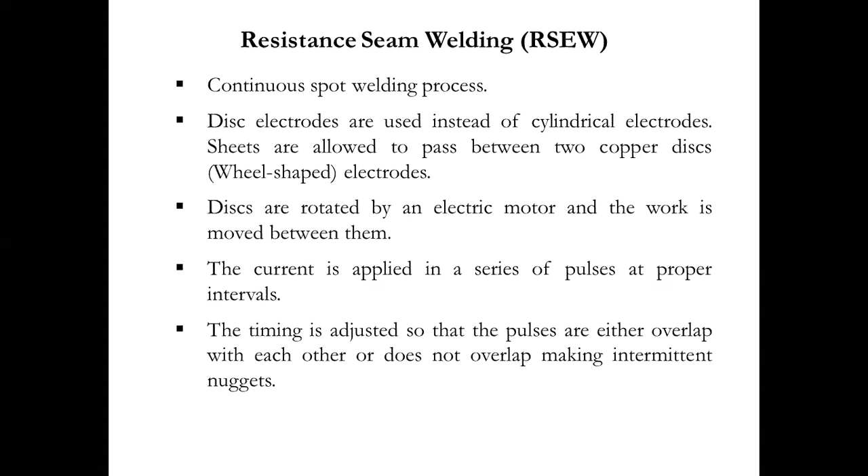The time taken for seam welding is very less compared to spot welding. In spot welding, you have to first adjust the workpiece and then it should be in contact. All that hold time or squeeze time will be very less in seam welding. So from the time point of view, resistance seam welding will be faster compared to spot welding.

Advantages: leak-proof joints can be done using resistance seam welding, and it is independent with respect to weld time and electrode speed. Both the speed of the wheel and the weld time are independent.

Disadvantages: it can only weld up to 5 mm. Here, the current supply and the pressure applied by the disc will be more in seam welding compared to spot welding. And you will have indentation marks, which are more in resistance seam welding.

Coming to the applications, it can weld MS (mild steel), aluminum, magnesium, and nickel alloys, watertight tanks, the flanges in watertight tanks, and pipes. Fabrication of tanks is done by resistance seam welding.

There is a utensil with me now. I'll show you after this session how the spot welding is done to that utensil. We'll see how it is done by the spot welding technique.

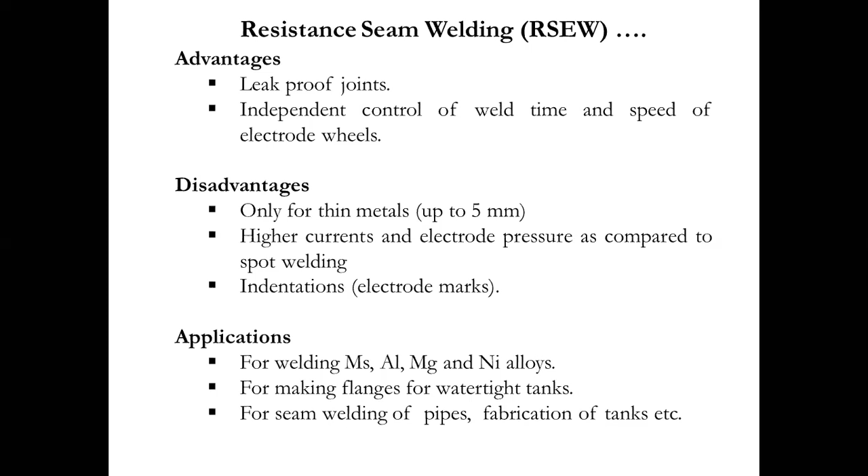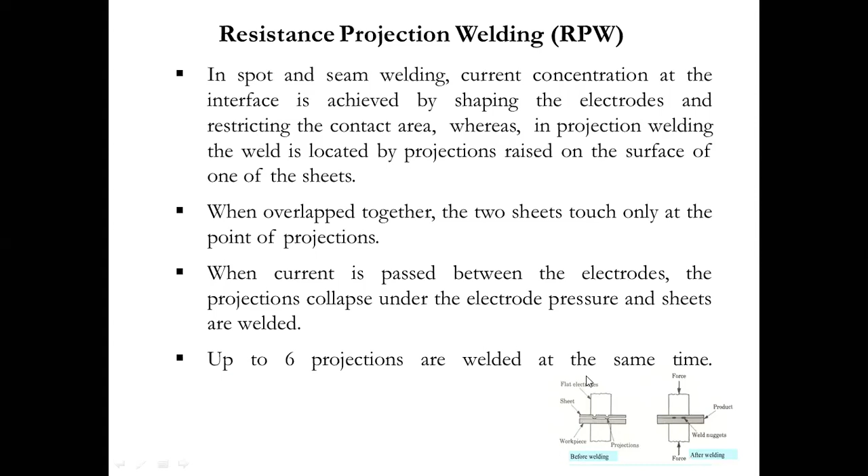These projections are raised onto the surface of the workpiece either by embossing techniques, and these projections are pressed, and you will apply the current and pressure simultaneously. So up to 6 projections you can weld at a time in resistance projection welding, and it is a very quick process when compared to spot and seam welding.

So this is the diagram before welding, and this is the diagram after welding. Please have a look of it.

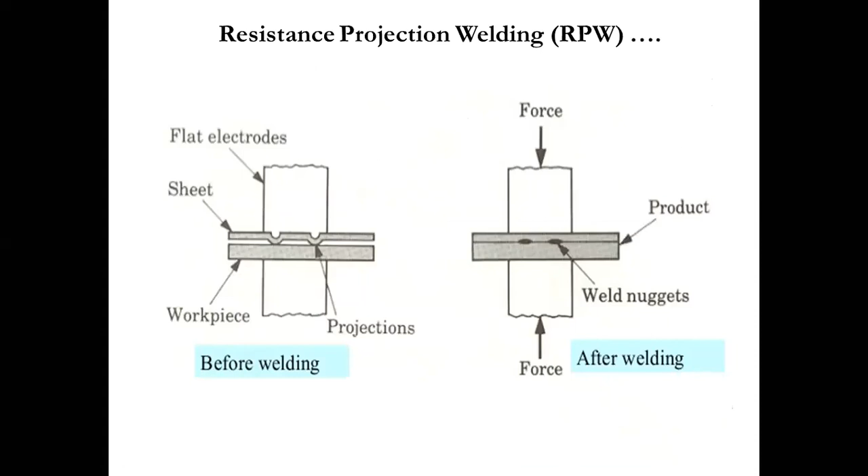Advantages: because of giving the pre-interfaces, or pre-interface is nothing but you are giving the projections beforehand, the life of the electrode will be high when compared to spot and seam welding. And here you will not have an electrode mark.

Whereas when you were doing spot welding, you were getting a mark on the sheet. So that mark is avoided as you are giving a pre-interface, or you can call it a synonym, you are giving a projection. So that's why you are not having any marks created by electrodes.

So less chances of distortion, and it is suitable for thick materials. As you are giving a proper projection beforehand, you will have a proper heat balance. And it is suitable if you want more spots at a time.

Disadvantages: again you have to do the embossing technique, so the cost is more, as it is two processes at a time, embossing and then welding. So prior operation is needed, and it is only suitable for strong materials. Copper and brass are not suitable for projection welding.

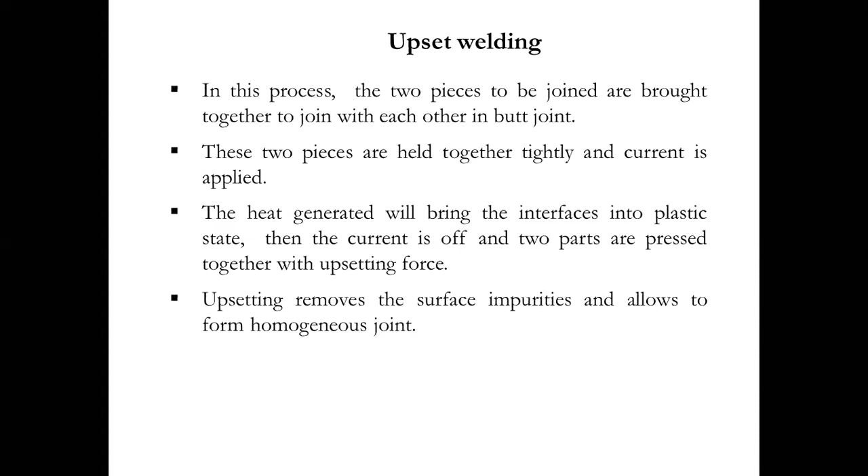Now we'll see, I'll just first compare. I'll show you the diagram now, then I will explain what upset welding is, and then I will compare it with flash welding. Then you will understand it very easily.

When these two workpieces slowly come into contact with each other, you get a collision, or in normal language, when you allow them to touch each other, the material will start transferring. There will be a transferring medium between these two workpieces.

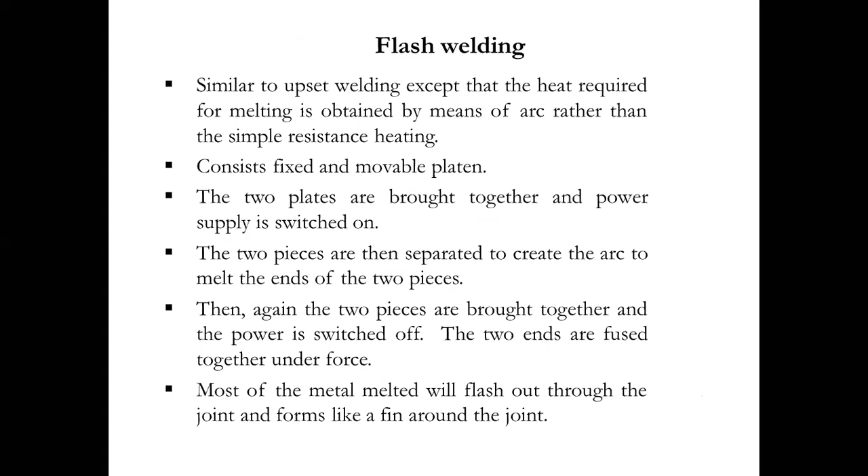Now let's see what is percussion welding. Percussion welding is similar to flash butt welding, and in some cases both machines look the same. The machines look similar, but the clamping systems are different in flash welding and butt welding. But in percussion welding, you will give a DC power supply.

In percussion welding, the same concept applies, you will weld the two edges, but here it is very percussion. The meaning of percussion is rapid - anything which we do rapidly, very instantly, very fast, is called percussion welding.

So in percussion welding, you will have the clamping system, you will have the current supply, but you will have a rectifier - you will have an AC supply and you will have a DC supply. And to that, you will have a capacitor which will smoothen the DC supply.

So when sending power, in percussion welding, first you will send the DC power supply to the workpiece. So you will get a high intensified discharge of electrons. As you are using DC, you will get negatively charged ions onto the workpiece.

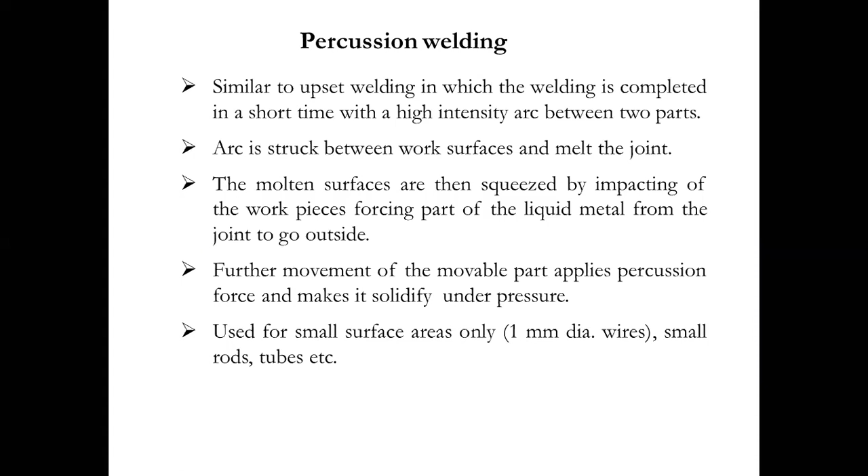So this is meant for joining wires, rods, tubes, etc. This is percussion welding.

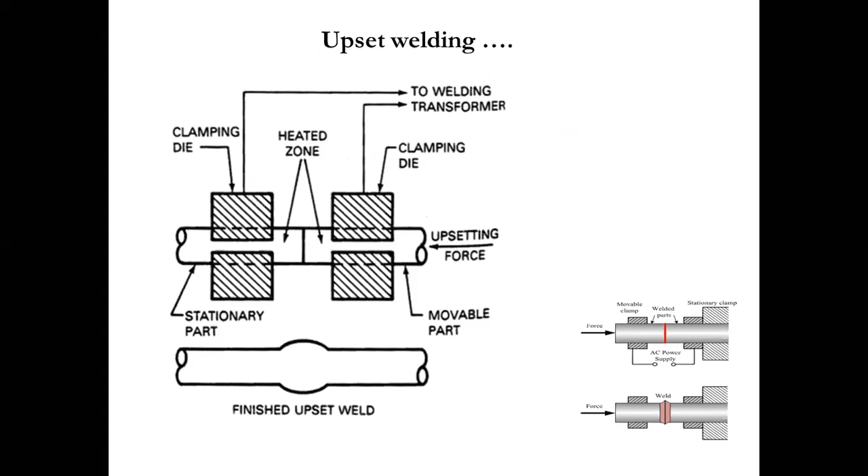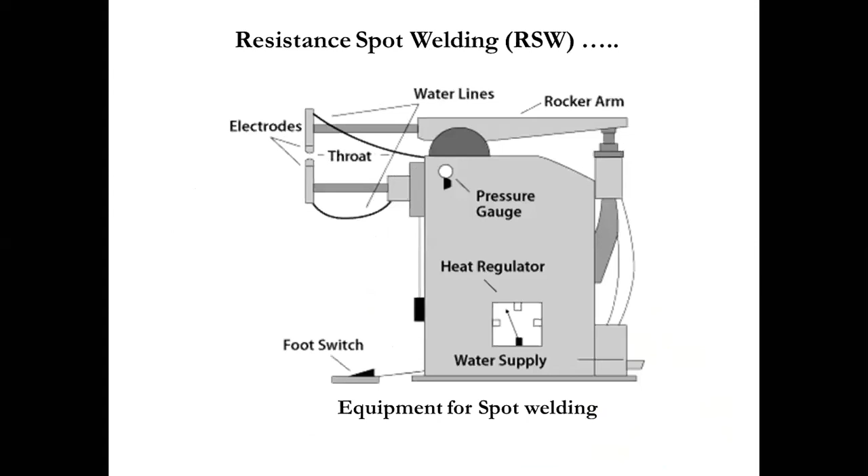So we had seen flash welding, we had seen upset welding or butt welding. Here you can see how the welding is done between the two edges of the rod. I had told you how to remember the difference between butt welding and flash welding. Then we had discussed resistance seam welding, resistance projection welding, and resistance spot welding. All these will come under the resistance welding category.

The first two are for lap joints. Projection welding is used if you have any projection, you can weld it through projection welding. If I want to do edge to edge contact or the butt joint, I'll go for upset or flash welding. If I want rapid, very intensified welding within a second, I'll go for percussion welding where I'll be using a DC power supply. So this comes under resistance welding.

Is it clear? Is it clear?

Ma'am, in percussion welding, the high DC current will be there, ma'am. Yes. So there will be some deposition type on the welding? Yes, you will get material, you will get a deposition.

I said the molten metal, you will get a groove or a step sort of thing. Again, you have to do the finishing method to remove that. Again, you have to do the finishing technique in percussion welding. Whereas in flash and butt welding, you will not get such grooves, just only surface to surface contact will occur.

Got it, yes ma'am. Percussion welding they will do for strong materials, whereas in upset flash welding they will do only for small rods or wires or tubes.

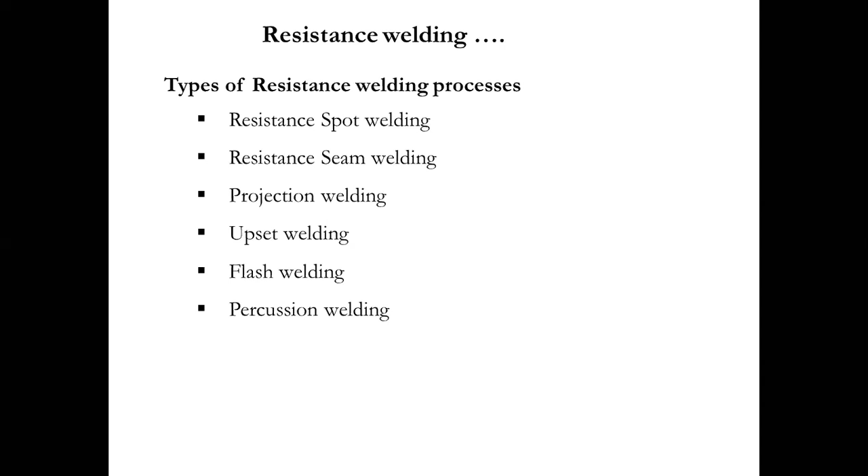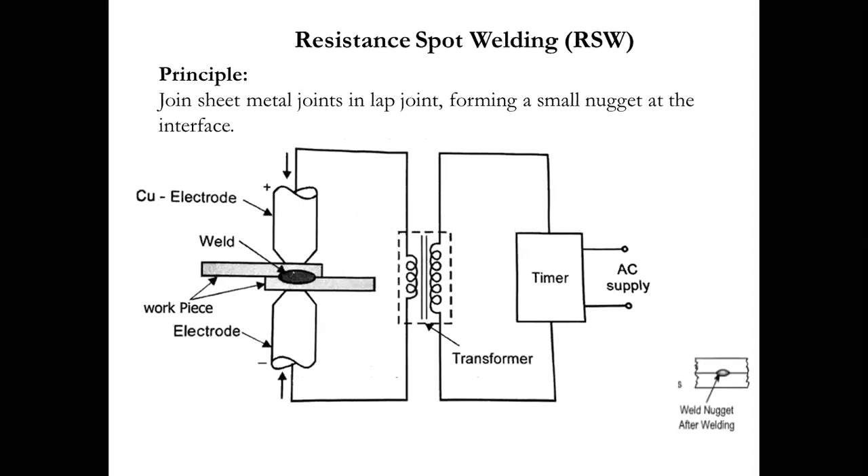There you will have less pressure, whereas here you are supplying heat and pressure also. One thing I forgot to say, in upset welding and flash welding, to make these two rods come in contact with each other, one will be fixed and the other one movable. There are two clampings, one fixed and the other movable.

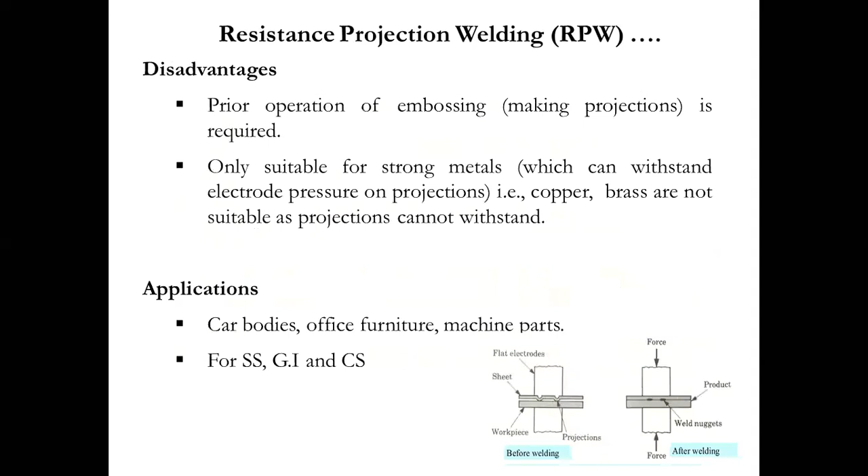Let me show you. Yes, one is stationary and the other one is movable. When you are putting it in contact with this rod surface, you have to apply a certain amount of pressure. So based on the application of pressure also, the flash or whatever the joint is, is dependent on the current and the pressure.

Please do remember, resistance welding is dependent on the amount of current which you send and the amount of pressure which we apply, in order to create the nugget between the two different surfaces.

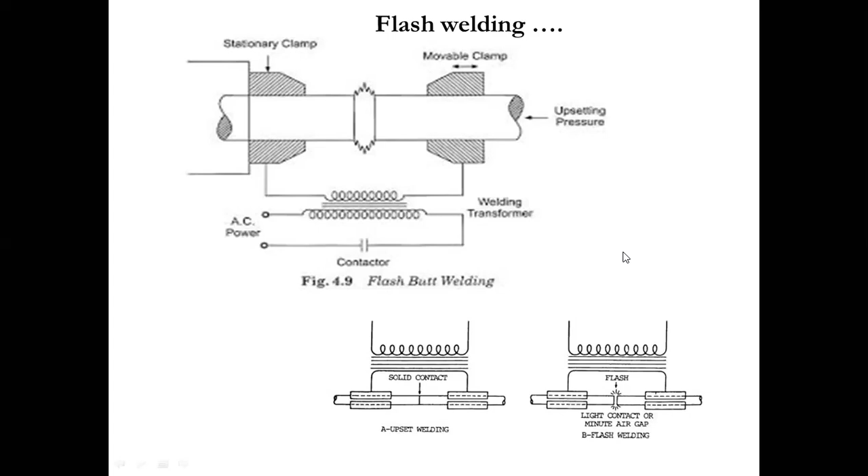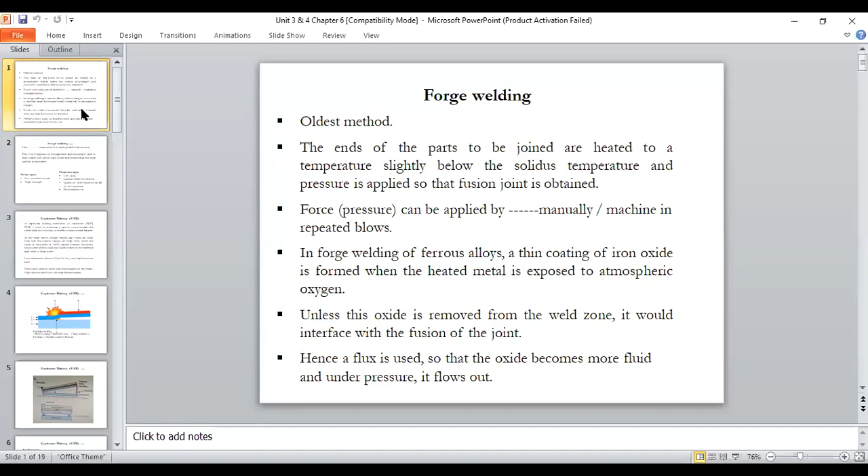Okay, can I go to the forge welding? Yes, ma'am. So now we'll see two types of welding processes under solid state welding, that is forge welding and explosion welding. Forge welding is the oldest technique, where you will be heating the material. In forging also, you were heating the metal and applying pressure by hammer, isn't it? Forging is an operation where you heat the workpieces to deform the shape. It's a technique under metal forming in your unit 5.

So you were heating the workpiece and hammering it in order to get the shape. That's the same technique in forge welding, where you heat the two parts which you want to join below the solidus temperature, and simultaneously you apply pressure in order to join and create a fusion joint. So you heat the material below the solidus temperature and apply pressure - that is called forge welding, mostly meant for ferrous alloys.

So here, as you are heating the metal below the solidus temperature, you will get an oxide layer formation. One main defect of forge welding is this oxide layer. It will be in contact with the heat affected zone and it will alter the mechanical properties of the workpiece. Whereas in your TIG, MIG and other welding processes, you use shielding methods, coating techniques, and alloying techniques. In forge welding, you cannot avoid this oxide layer being at the interface with the welded joint.

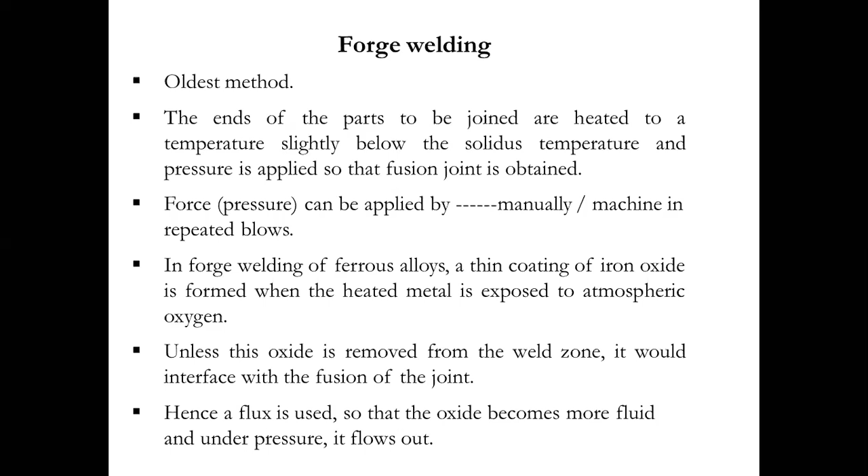Whereas in resistance welding, in order to create the heat, you were using current flow. In this forge welding, you are not using current at all - you are just heating it to a certain temperature and then applying pressure in order to fuse it. So it's the oldest technique, forge welding.

The flux materials which they coat depend upon the material. Generally, the flux materials are borax, silica, sand. Based on the material, they give the flux coating. If I'm using low carbon steel, this oxide layer will melt out even at a lower temperature, so there is no need of flux coating. Whereas for stainless steel, you will give the flux coating, then heat it and apply the pressure.

This is forge welding, very simple - heating and applying pressure where you want to join, then you get the joint which you want to create. That is forge welding. So its advantages are less residual stresses and high strength.

As you're not having the strength, the heat affected zone is not much altered here. When you compare TIG or MIG, in the HAZ the location of the molecules are moving away, right? In the welded zone, the location will be very tight enough. Whereas in the heat affected zone, it will start dislocating. When the molecules are dislocating or moving apart, the mechanical properties are less. At the joint, the strength will be more, whereas in the neighbor area the strength will be less.

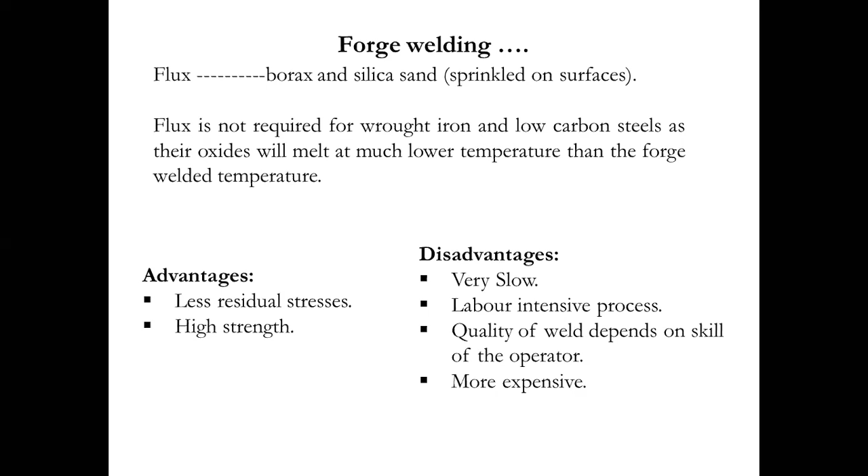But this you can avoid by using forge welding. This is a very slow process and the quality depends upon the operator, how much you are heating, how much pressure you are applying. So it is a more expensive process.

Coming to explosion welding, it is very simple in the sense it is easily understandable, but it is a very hazardous welding technique, as you are using an explosive material. First we'll see the diagram, then I'll explain you.

Here I wanted to weld the two workpieces. This is the first workpiece and this is the second workpiece. I wanted to join them in the form of surface to surface contact. Till now I was just joining edge to edge contact, but in explosive welding I can clad two dissimilar metals or similar metals, similar plates. The application of explosive welding is that two dissimilar metals also can be joined by explosive welding. So how it takes place is this.

The blue colored one you call the flyer. The sky blue colored plate you call the target plate. So this is first workpiece, second workpiece. On this first workpiece I will spray the explosive material like TNT. We are seeing this explosive metal forming. The examples of explosives are TNT, dynamite powder.

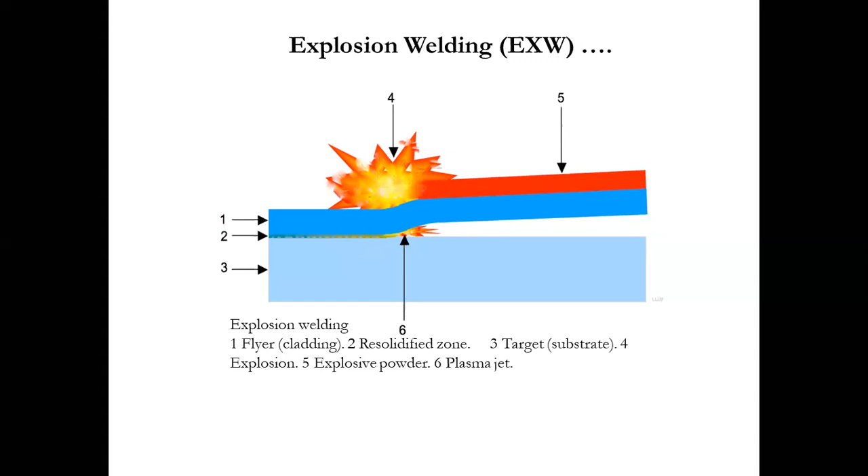It's just like bombarding a workpiece with the explosive. This explosive will travel, and you can even put a rubber sheet in order to have less heat dissipation from the first workpiece to the second workpiece. This rubber piece will melt out and you can remove the melted section. Ultimately, in explosive welding, it is meant for surface to surface joint - not just a single joint, it is a surface to surface cladding of two similar and dissimilar metals.

Now we'll see the explanation in this slide. In explosive welding you will use the explosives RDX and TNT, and this explosive will allow the first workpiece to bend onto the second workpiece, and the velocity here will be between 2.4 to 3.6 kilometers per second.